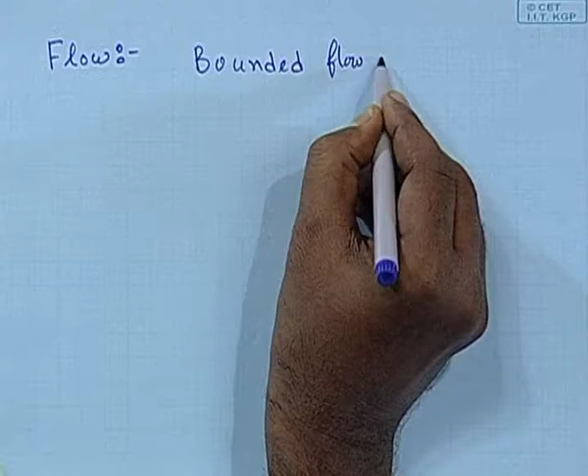The flows will be considered mainly of 2 types. One is bounded flow - the example is flow through a conduit. This conduit may have a circular cross section, then it is a pipe. It may have a rectangular cross section, then it is a channel flow. It may have a triangular cross section or whatever.

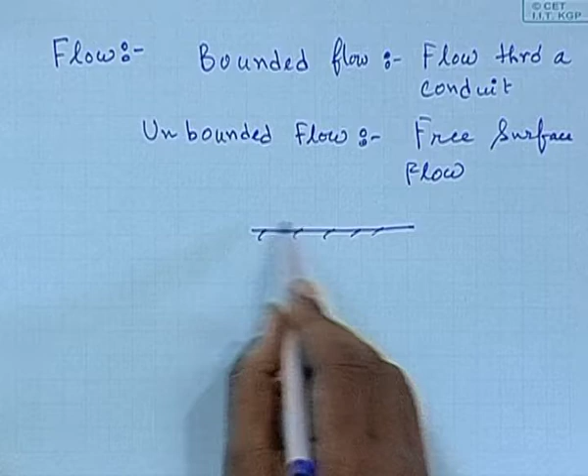The second one is unbounded flow, sometimes known as free surface flow. That means it is not flow through a conduit - there is a solid wall, flow is occurring over that, and the other end is open to atmosphere. This surface is free, it is not bound, so it is called a free surface flow.

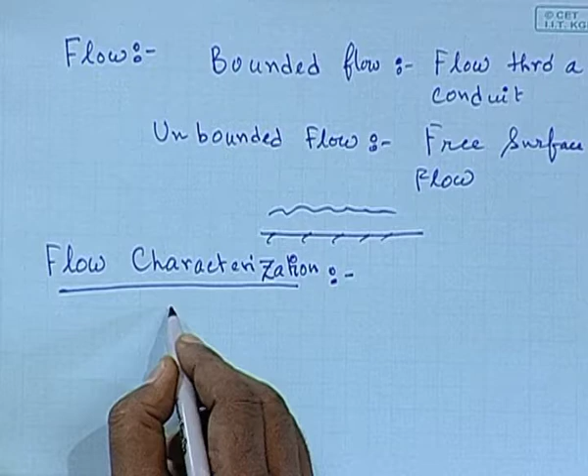Now, what is flow characterization? We will be looking into the point variation of some dependent variable inside the flow domain, like velocity components. It is basically the determination of velocity components as a function of x, y, z, t or r, theta, z, t - either in rectangular coordinates or cylindrical polar coordinates, whatever you are having. There will be three components of velocity: x component, y component, and z component, as a function of space and time. If you know this completely, then the flow behavior in the flow domain is completely established.

Determination of temperature profile.

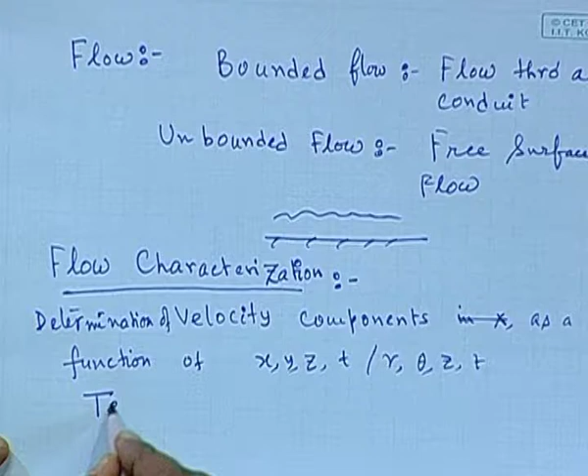Determination of concentration profile as a function of space and time. So, flow characterization means determination of velocity components, the temperature profile, the concentration profile of various species present in your system, as a function of space and time. Once all these quantities are known to you, you can characterize or visualize a flow.

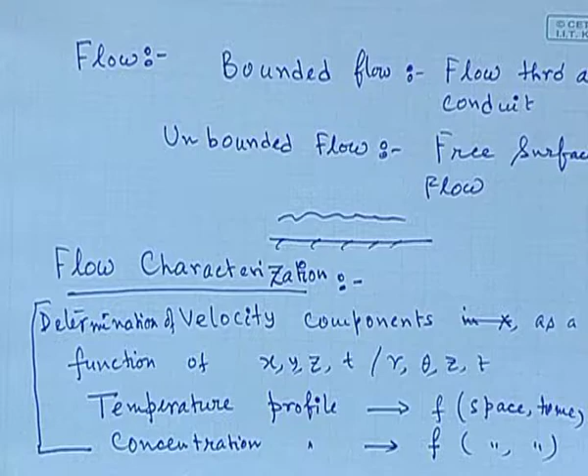Now, suppose you determine all these quantities, what is the outcome? What will you be doing with these determined quantities? The outcomes are, you can compute cross sectional average velocity. Suppose a steady state flow is occurring and you know velocity is a function of x, y, z. So, you can carry out a computation to calculate the average velocity, which is basically the average over the cross section. Why is this required?

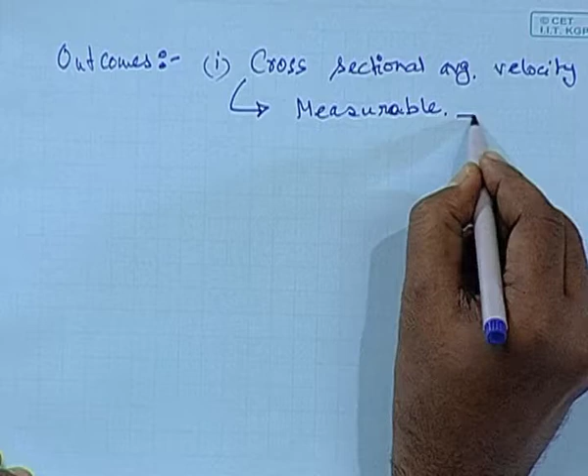You can measure this value. So, you connect all your computed variables to the measurable quantities, like there is an instrument called Rotameter, you must be knowing about it. What does the Rotameter do? The Rotameter is placed in the flow line and it measures the flow rate. Since the flow rate is measured, and you know the area of the cross section of your flow channel, you divide the flow rate by that cross sectional area, and you will be getting the average velocity.

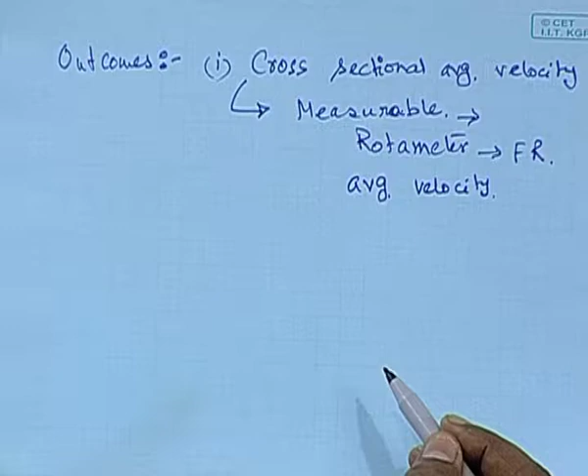So, all these quantities that you are computing or calculating should be compared against the measurable values. Like all the velocity components that you are calculating, you should calculate the cross sectional average velocity, because it is a measurable quantity. Why do that? You can determine whether the flow is laminar or turbulent. This is directly connected to determination of flow regime: laminar, turbulent or transition.

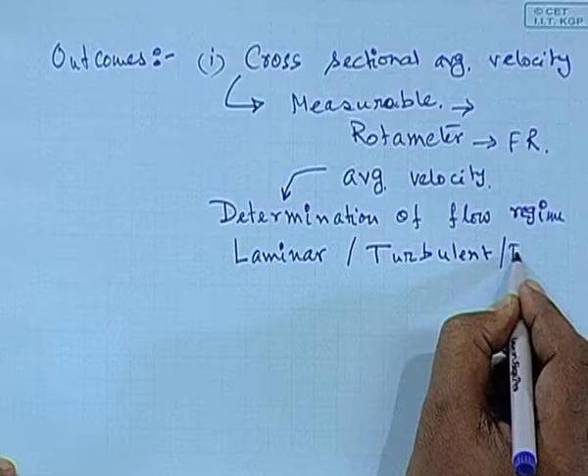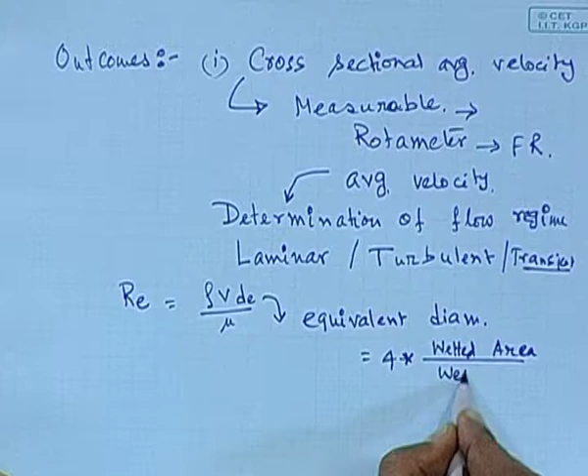There is a dimensionless number called Reynolds number. It is defined as rho v d by mu. D is basically equivalent diameter. De is equal to pipe diameter if it is a flow through a pipe. It is equivalent diameter for other channels, defined as 4 into wetted area divided by wetted perimeter. D is basically diameter if it is a pipe. If it is not a circular cross section, it will be calculated using this formula.

Suppose you are having a rectangular cross section with W as the width and H as the height. What is D equivalent? D equivalent will be nothing but 4 times wetted area. What is the wetted area? Width times height. What is the wetted perimeter? Now, if h is very small compared to width, if it is a thin channel, then you can neglect h in the denominator, and this w will simply cancel out, giving twice of h. This applies if it is a very thin channel.

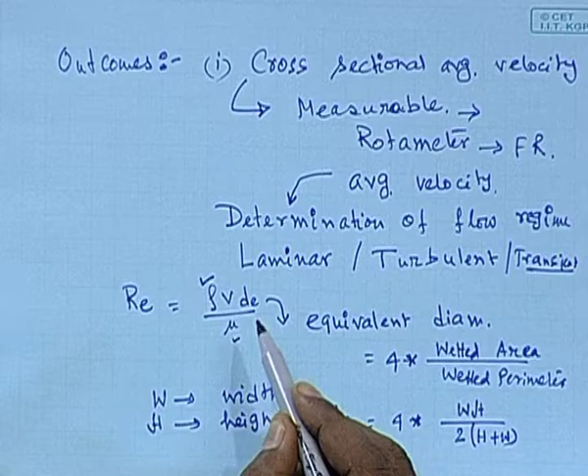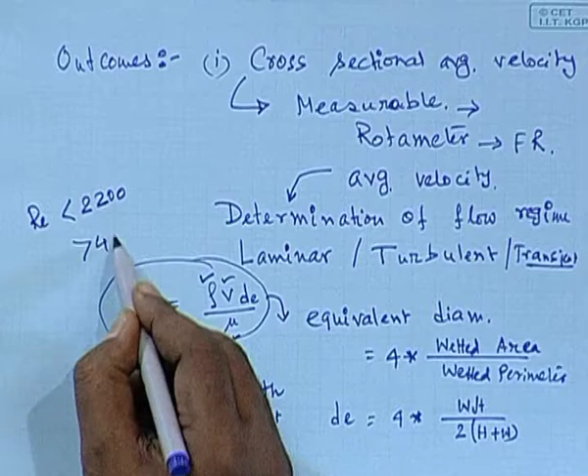Now, rho is the density of the fluid, mu is the viscosity of the fluid, v is the cross sectional average velocity. Once either you measure or calculate the cross sectional average velocity, calculate the Reynolds number, that is important. If Reynolds number is less than 2200, it is called a laminar flow. If it is greater than 4000, it is called a turbulent flow. If it is in between, it is called a transient flow. So, from the cross sectional average velocity, you can find out the Reynolds number in your flow domain and the flow regime, whether it is laminar, turbulent, or transient.

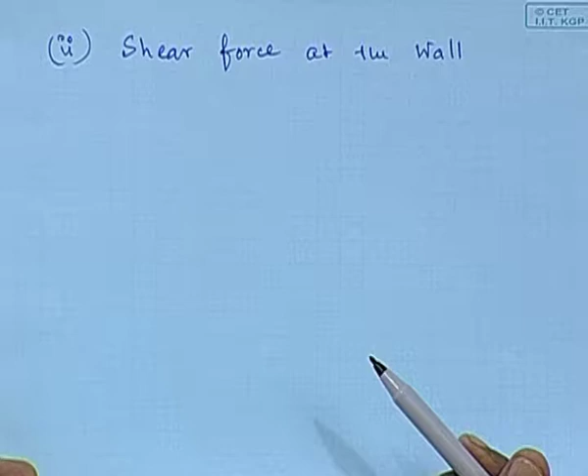The second quantity that you can calculate is the shear force at the wall. That means if there is a flow over a plate or over a tube or whatever system you are having, the fluid flowing over the wall will give rise to a force. So, you have to apply an equal force from outside to keep the material, over which the flow is occurring, in place. That shear force can be calculated from the cross sectional average velocity.

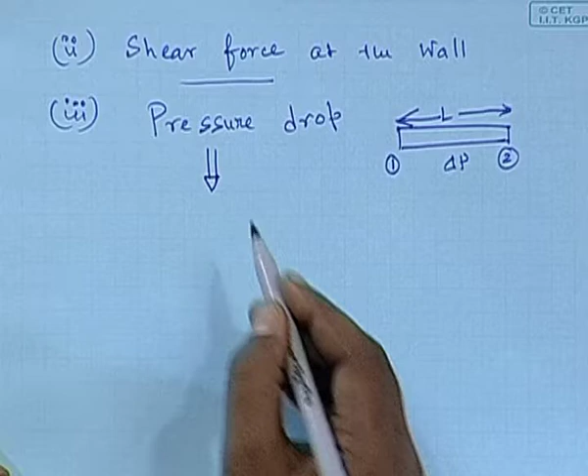The third quantity you will be calculating is the pressure drop. From all these velocity components etc., you can find out what is the pressure drop across the line. Let us say station 1 and station 2, what is the delta p over this length L. This is very important from a chemical engineering point of view. Whatever you do in any fluid mechanics book, a typical exercise will ask you to calculate the pressure drop across this length. You do a heat exchanger calculation, and one of the design aspects is calculation of the pressure drop.

A pump is forcing a fluid to flow from station 1 to station 2. What is the pressure drop? Why is the pressure drop important? The pressure drop is important because the flow is occurring due to that pressure drop, and the upstream pressure is always greater than the downstream pressure, so that the flow will occur in the forward direction from 1 to 2. Now, estimation of delta p is very important because it directly relates to the rating of the pump.

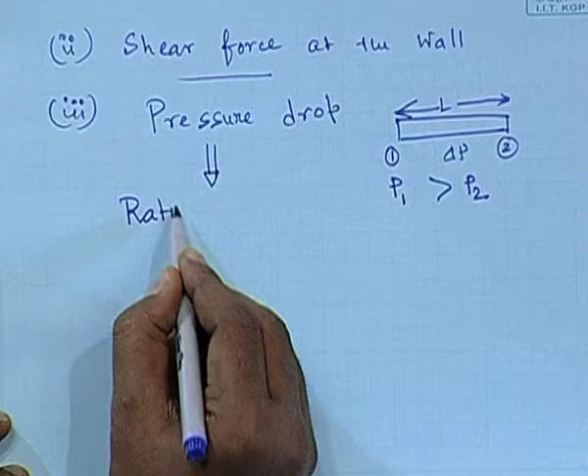What is the power of the pump that you will be requiring, maybe you will be designing for your plant? You have to calculate if this much amount of flow is occurring through a tube of this length and diameter, what is the delta p, which is directly related to the rating of the pump. So you can tell them, I require a 1 horsepower pump to materialize this type of operation.

Whenever you will be transporting a liquid, you require a pump. Whenever you will be transporting a gas, you will be requiring a compressor. So whatever the fluid may be, you require the pressure drop calculation. That is very important.

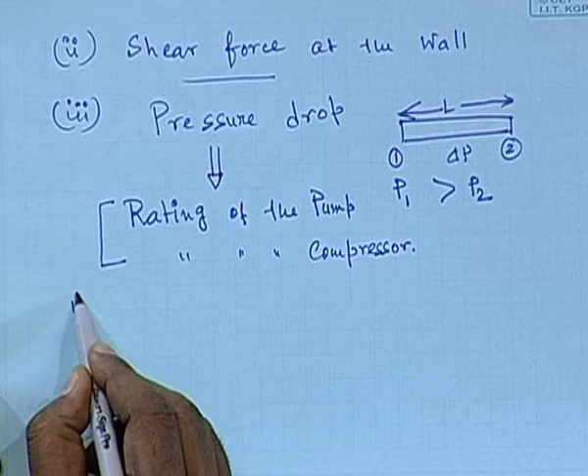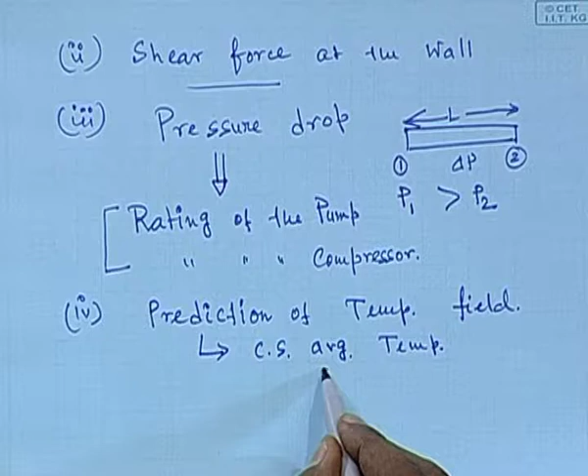The fourth one is prediction of temperature field. From that you calculate the cross sectional average temperature. Temperature field means temperature is a function of x, y, z and t. Now you do a cross sectional averaging and get the average temperature. This is measurable - you just insert a thermometer or thermocouple, that will not give you a point value of temperature, it will give you an average value.

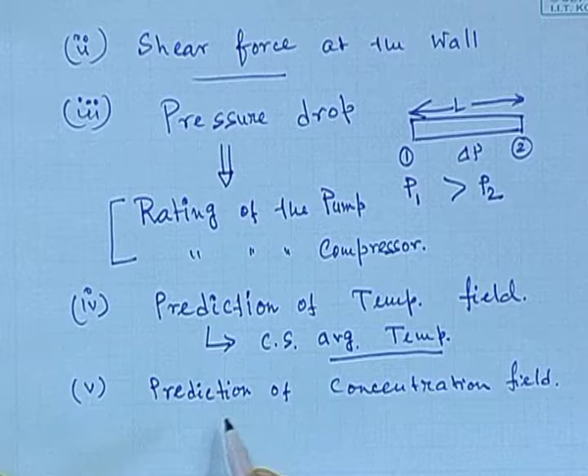You calculate the concentration field as a function of space and time and do a cross sectional averaging. If you take out a sample from any point of the pipeline and give that for analysis in the laboratory, that will give you basically the average concentration. So the cross sectional average concentration is important, and you can compare your calculation with these measured values and come to a conclusion whether your calculation is correct or not.

Why are you requiring these calculations? Because whenever you will be joining a company or doing some R&D activities, probably you will be given a target - this much amount of flow rate, or this much amount of product liter per day I would like to have. Now you have to give a design - what will be the length, what will be the diameter, what will be the pressure drop, what will be the rating of the pump. Now you conduct certain experiments, and you can say okay, these will be the specifications so that you will be meeting your target.

Now your business will be growing up, and after 6 months you would like to scale up your plant. So again you will be doing the same type of experiments? No, you should not, because conducting experiments requires involvement of manpower, cost of raw material, cost of equipment. So you do a model calculation and predict on a very small scale what will be the performance. If that matches with the experimental results, you can just scale up your feed components, or concentration, or volume of the reactor, etc., and get your predictions. By doing these calculations, first, you will be reducing the number of experiments you conduct to verify a particular target. Secondly, by doing this simulation, you will be reducing your manpower involvement and cost involvement of raw material or daily labor. That is why these calculations are very important.

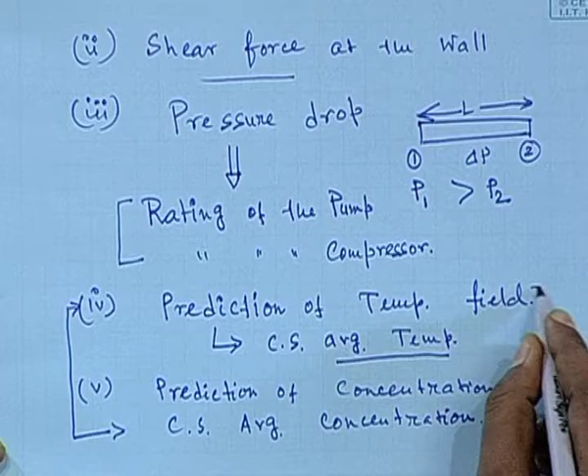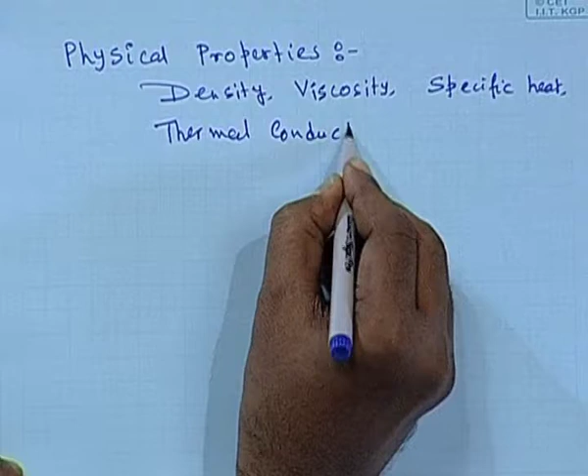Let us look into the various physical properties that will be involved in such calculations - density of the fluid, viscosity of the fluid, specific heat, thermal conductivity, diffusivity.

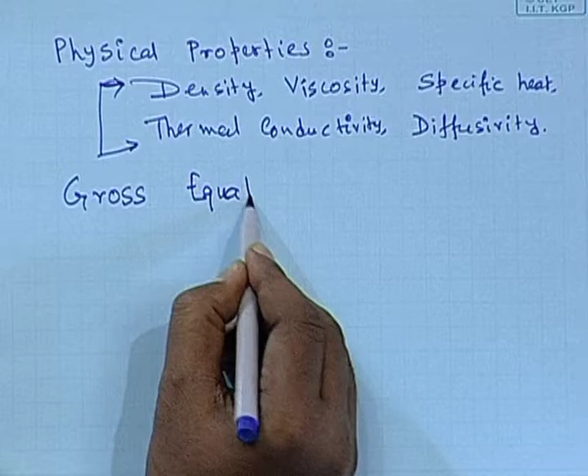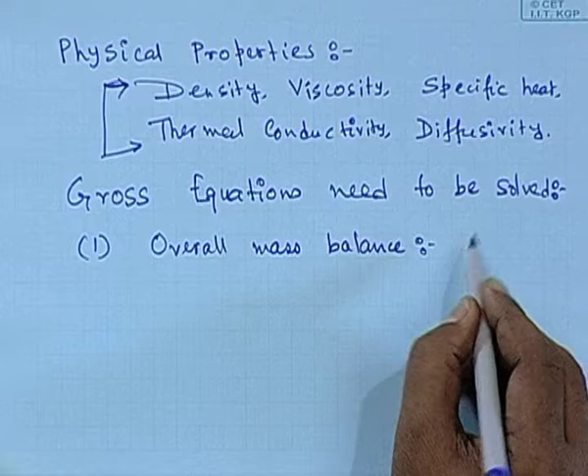These properties are typically involved in all of the transport calculations, and these are also known as the transport properties. Now let us look into what gross equations need to be solved in such calculations. The first equation you are going to write is the overall material balance. In its differential form, all these equations are partial differential equations. The overall mass balance or material balance is basically also known as the equation of continuity. The second group of equations you are going to write down is the momentum balance equation.

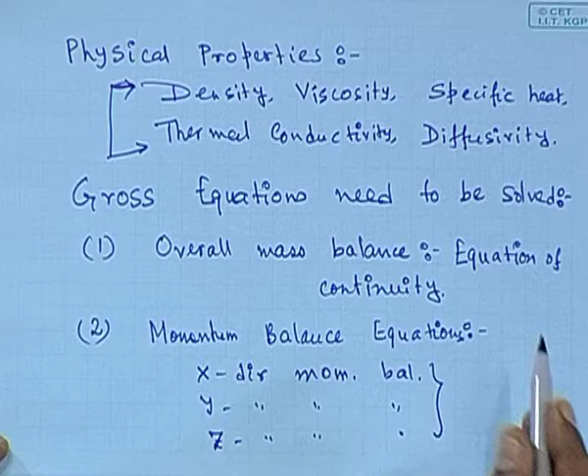In momentum balance equations, you will get 3 momentum balance equations: one in the x direction, second in the y direction, and third in the z direction. All these equations involve Vx, Vy, Vz and pressure. Vx is the velocity component in the x direction, and similarly for y and z directions, and pressure variation as a function of x, y and z.

These equations are also known as the equations of motion, and they are also known as the Navier-Stokes equations. So you will be writing one overall mass balance and 3 overall momentum balance equations in their differential form.

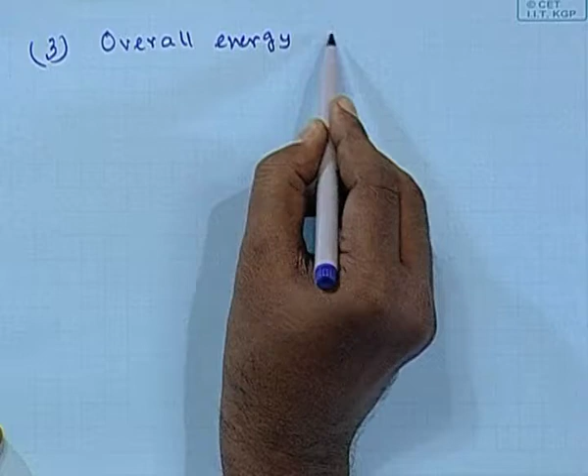The third equation you are going to write is the overall energy balance. From this, you will be getting the temperature profile as a function of x, y, z and t in general. This overall energy balance involves the velocity terms as well as the conductive terms, that is, convective terms as well as conductive terms. So these will be coupled with the momentum balance equations.

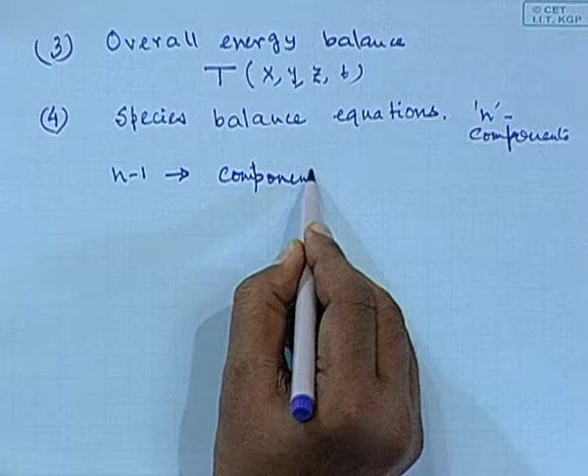Suppose you are having a reactive system. Two reactants are reacting and giving rise to one product, two products, or whatever products. Let us say n number of species are involved, n components are involved. So you will be writing n minus 1 component balance equations, species balance or component balance equations. Why n minus 1? You will leave behind one, the last component, which will be calculated from the overall material balance.

Overall material balance has to be used to find out the concentration of species, let us say the nth component. For n minus 1 components, you will write the component balance equation, and the last one will be found out from the overall material balance. If you write the component balance equation for the nth component instead, you will find that the overall material balance may not be matching.

Then that will be a typical problem, a very serious problem. You are doing a calculation, a simulation between 2 points through a pipeline where a reactive system is going on, let us say a polymer reaction, and you know how much monomer has been fed per unit time. The same amount of product should come out at any cross section at the exit of the pipeline or reactor. So the matching of total material balance is very crucial.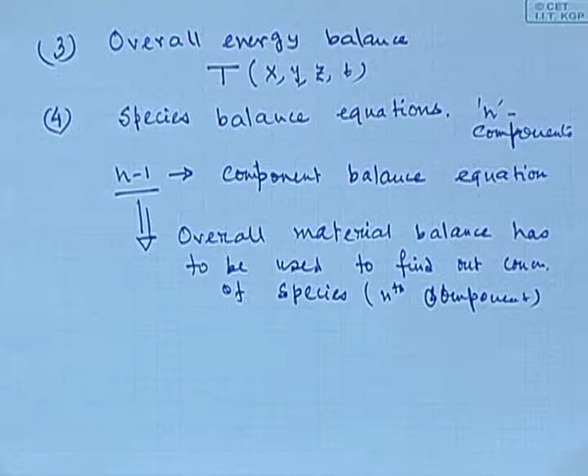Recently we were doing a project for Gas Authority India Limited. They had some polymer reaction going on in their reactor system, and we had to simulate the reactor system. We found that whenever we wrote all the component balances, the overall material balance was not matched. It always happens. So you leave behind only one component, do n minus 1 component balances, and calculate the last one from the overall material balance by subtracting.

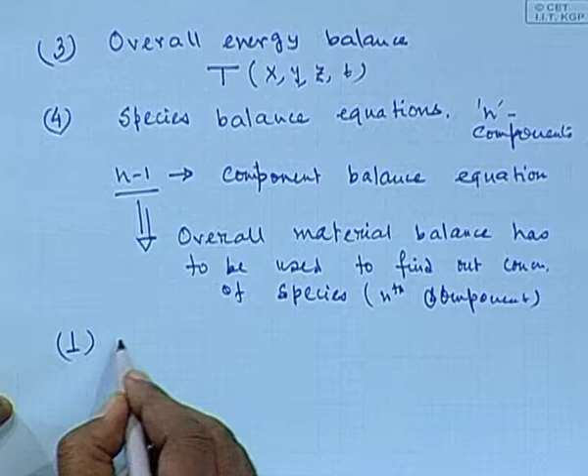So from equations 1 and 2, you will get the velocity components and pressure distribution. That means you will be getting Vx, Vy, Vz and P as a function of x, y, z and t. There are 4 unknowns and 4 equations: 3 equations in momentum balance and 1 equation in the continuity equation. So, 4 equations, 4 unknowns, a solvable system.

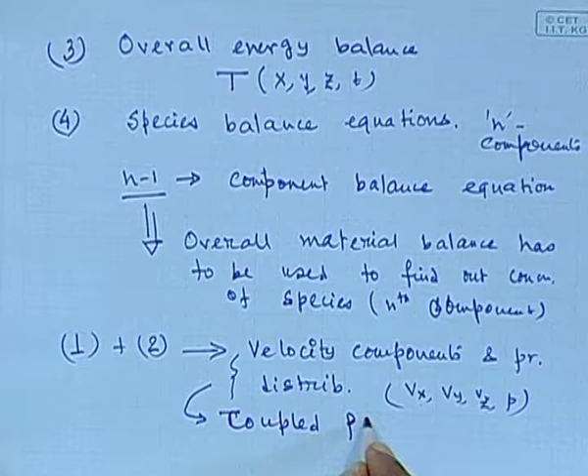Now, typically these equations are coupled partial differential equations. Under certain simplistic situations, you can simplify these equations and omit some of the terms.

A typical example is, suppose there is a flow through a thin channel, and the z component is pretty long. If the z component is pretty long, all the derivatives with respect to z will be very small. So you can neglect those terms occurring as del z, since they will be negligibly small compared to the other terms. So under certain simplistic conditions, the various terms in the equation of motion can be omitted and the whole equation can be simplified.

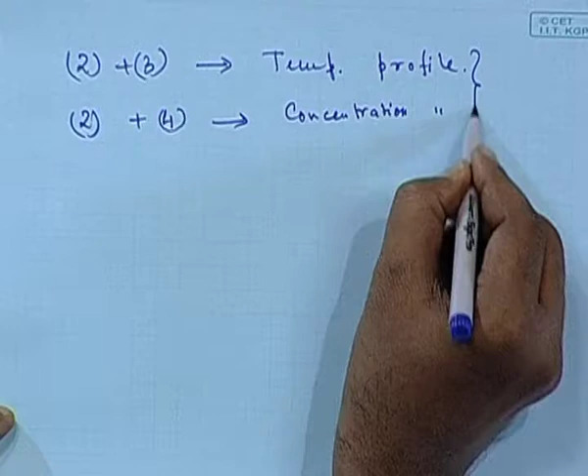From equations 2 and 3, you will get the temperature profile. From equations 2 and 4, you will get the concentration profiles of various species. These are coupled equations, but under certain situations, they can be decoupled.

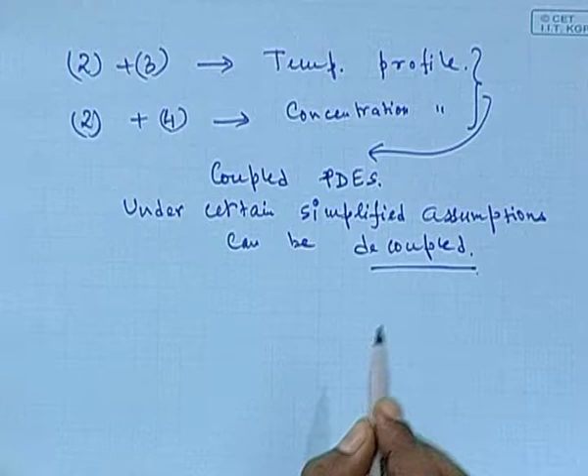We have discussed several equations and covered all the equations required to solve problems in this course or any transport process. Now, specifying an equation to solve a particular problem is not enough. You must also have certain boundary conditions.

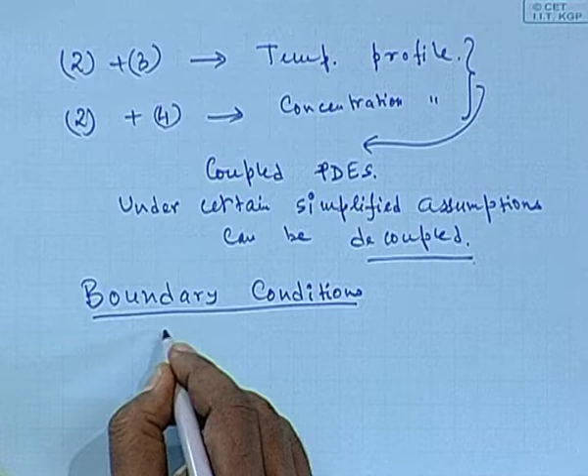Without boundary and initial conditions, you cannot solve a differential equation. Let us look into typical boundary conditions that appear in fluid mechanics problems. Generally, six types of boundary conditions can occur.

The first one is the solid surface. The condition on the solid surface must be specified, and this solid surface can be porous like a membrane, or impervious like a solid tube.

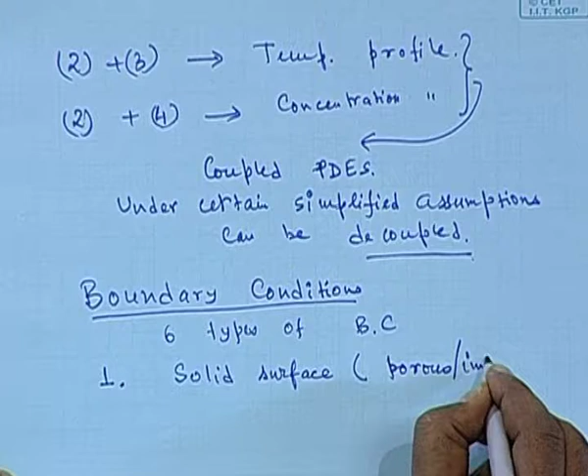A free liquid surface, such as in open channel flow or free surface flow.

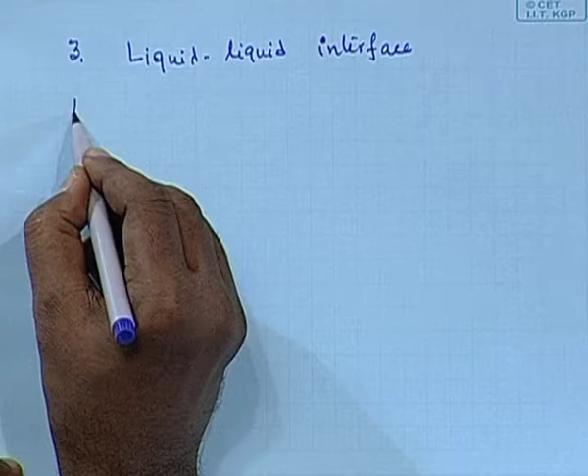Liquid vapor interface.

Sometimes the inlet or exit conditions are specified, and these appear as boundary conditions in our problem. Suppose there is flow through a channel with a reactive flow, and at the inlet the concentration is specified as C naught. That becomes one of the boundary conditions.

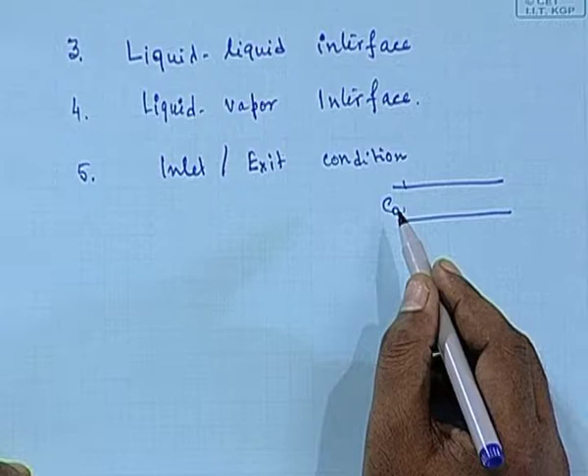The sixth one is known as the physical boundary condition. The other five boundary conditions we discussed are specified directly in the problem. But the physical boundary conditions may not be specified; they appear from confirming the physics of the system.

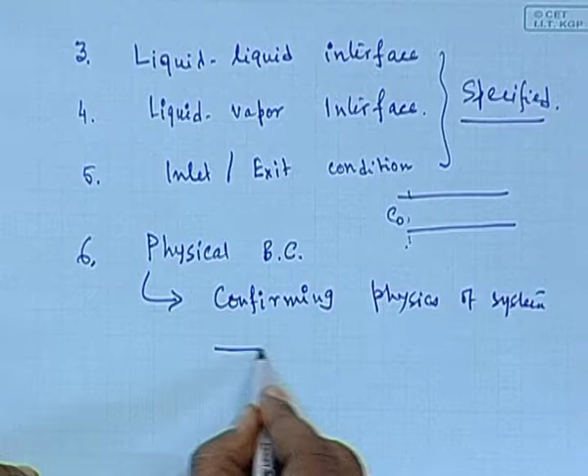Suppose there is flow through a tube of radius R, with fluid flowing with velocity V in the x direction. At r equal to capital R, the velocity component in the x direction is zero, because the wall is stationary. This is known as the no slip boundary condition, which I will explain further shortly.

On the other hand, at r equal to R, these equations are typically second order, so you require two boundary conditions to solve them. At r equal to 0, meaning at the centerline, the velocity will be finite, but you do not know its value. In fact it will be maximum there, assuming some finite non-zero constant value, but you do not know that value.

So either you use V x is finite at r equal to 0, or you use del V x del r equal to 0 at r equal to 0. V x finite means mathematically you have a profile like a1 plus a2 by r plus a3 r squared, and the constants are evaluated from the conditions.

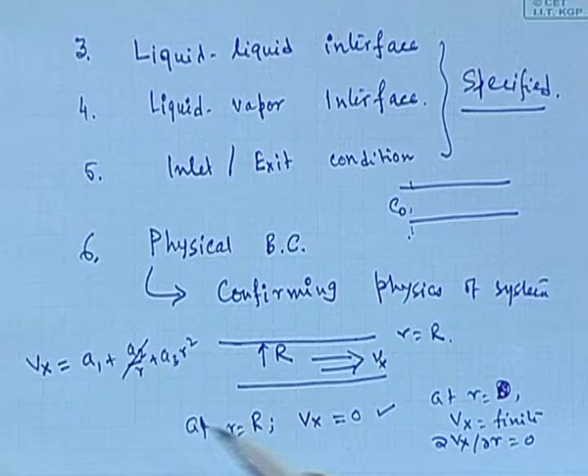At r equal to 0, V x should assume some finite value, but if you put r equal to 0, the a2/r term becomes infinite, making the whole velocity component infinite, which cannot happen. So the conclusion is that constant a2 equals 0, which is equivalent to saying del V x del r equal to 0. This comes from the physics of the system, and is known as the physical boundary condition.

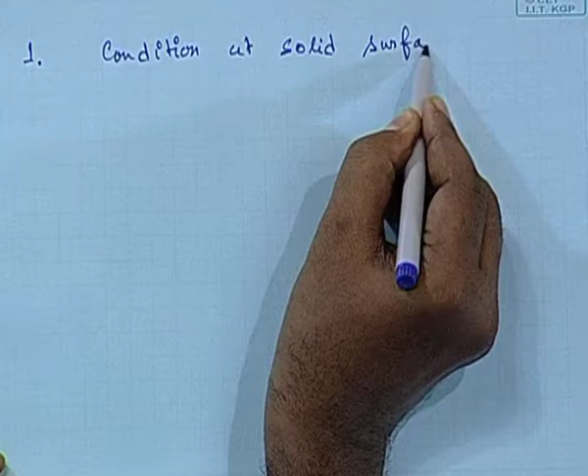Some examples of this boundary condition: the condition at the solid surface. If you have a stationary or impervious wall, V is equal to 0, meaning V x equals V y equals V z equals 0.

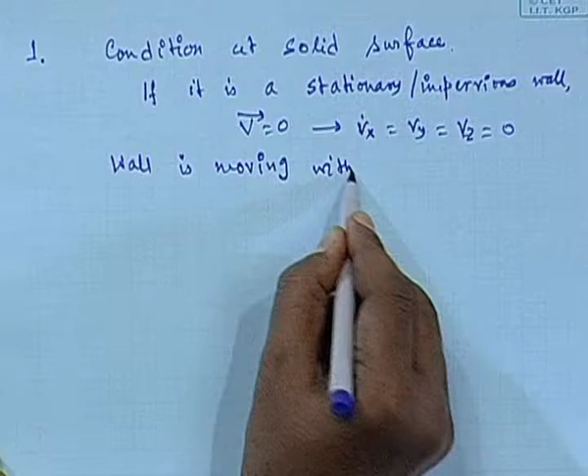If your wall is moving, let's say moving with a constant velocity u0 in the x direction, then V x will equal u0 at the wall. This is known as the no slip boundary condition.

There is absolutely no slip between the wall and the fluid particles adjacent to it, meaning the fluid particle assumes the velocity value of the wall. If the wall is stationary, the fluid particles will be at rest there. If it is moving, the fluid has the same velocity. This is known as the Couette flow, the flow induced by the motion of the wall.

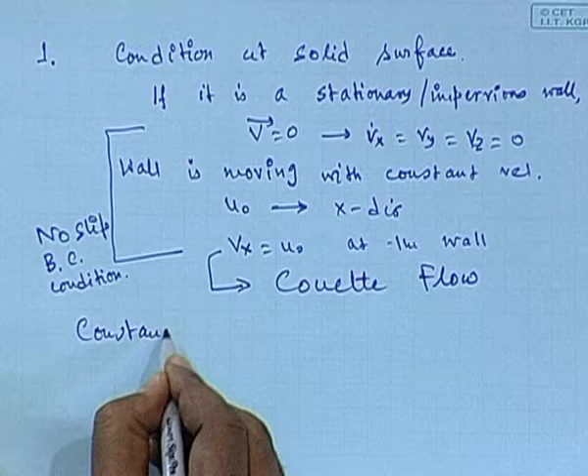Similarly, you can have a constant wall temperature condition, known as the CWT condition. Suppose fluid is flowing through a tube, and at r equal to capital R on the wall, you maintain a constant temperature T naught. This is known as the constant wall temperature condition.

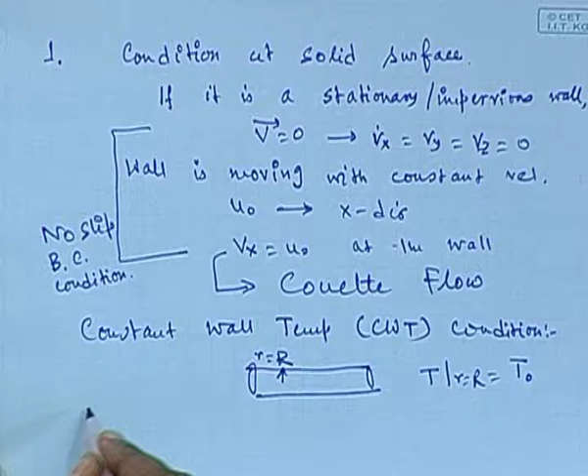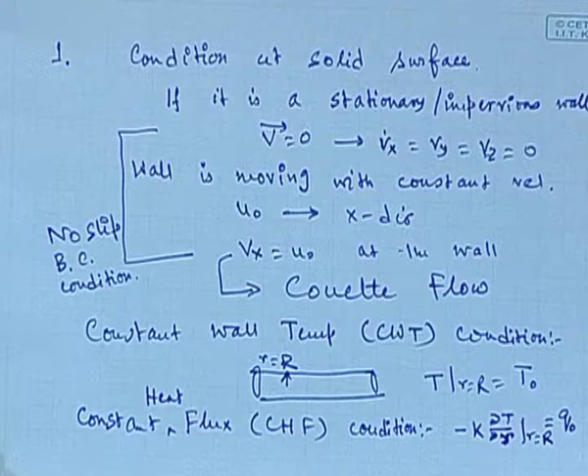Sometimes the heat flux at the wall is maintained constant, known as the constant flux condition. In this case, minus k del T del r at r equal to capital R is constant, let us say q naught. Suppose you put an electrical wire around the tube and pass a current generating energy at a constant rate, adding constant heat flux at the wall. Sometimes heat is extracted from the wall at a constant rate. Either way, it is known as the constant heat flux condition.

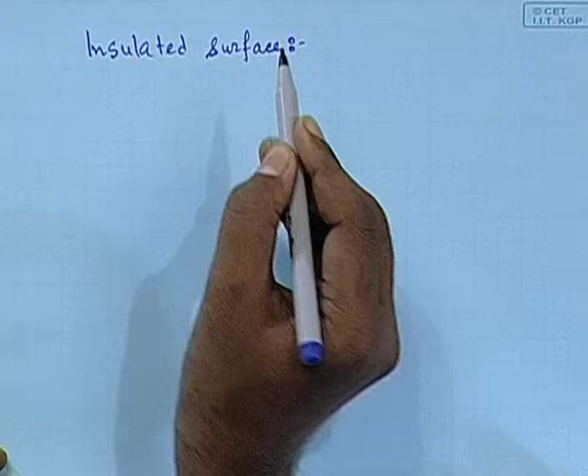Insulated surface is another example. The surface is insulated, meaning you are not allowing any heat to go out or come into the system. That means at the surface, minus k del T del y equals 0, where y is normal to the surface. So del T del y equals 0.

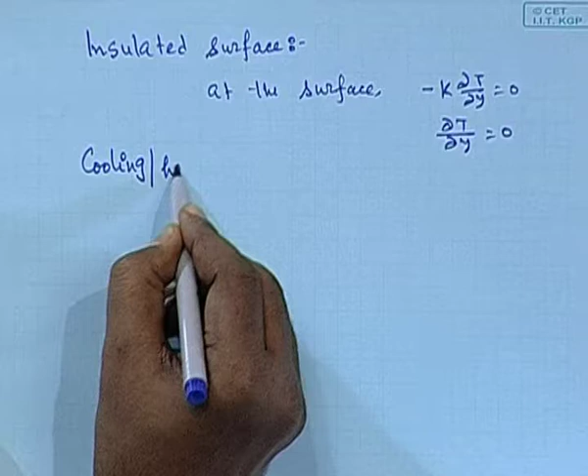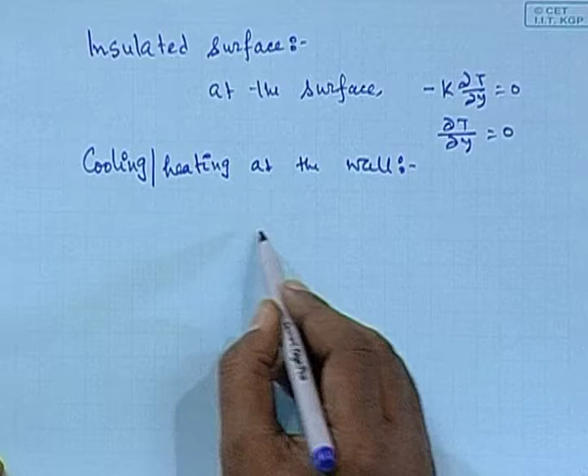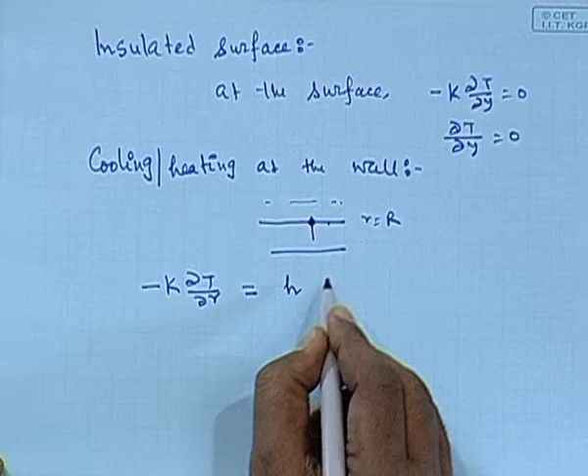Cooling or heating at the wall: suppose you are conducting an exothermic reaction in a tubular reactor and the temperature is rising, so you want to cool it down. On the outside of the reactor you put a cylindrical jacket and pass ice water. For this situation, the total heat coming out at the wall will be convected away by the fluid outside. That means minus k del T del R equals the heat flux at the wall, which equals the heat convected away by the coolant, h times (T minus T C), where h is the heat transfer coefficient and T C is the coolant temperature at R equal to R. This is known as the cooling-heating condition at the wall.

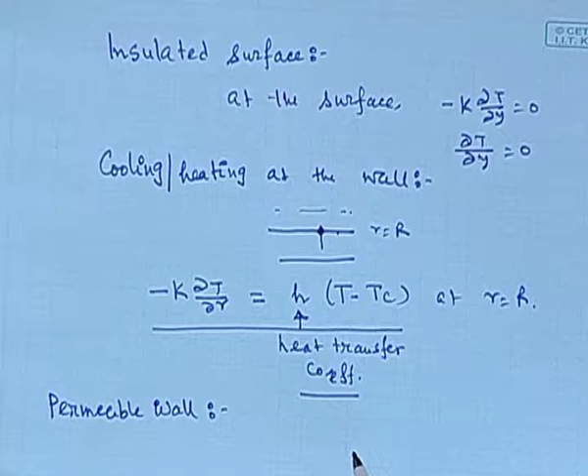Permeable wall: suppose the wall is porous like a membrane. In a channel, you place a membrane at the bottom plate, so fluid will come out through the porous membrane. At y equal to 0, Vx equals 0 because of the no-slip condition, since the wall is not moving in the x direction. But Vy equals minus V0, where V0 is the constant permeation rate through the wall. If the wall is permeable, this type of boundary condition can appear.

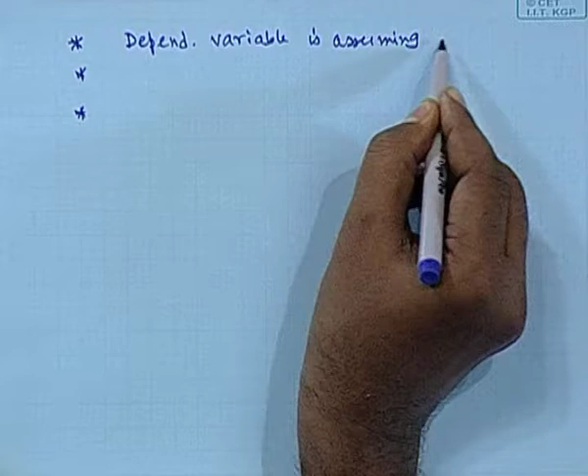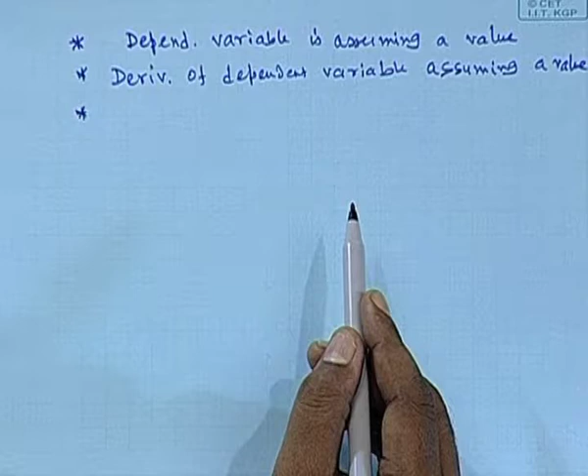Now in mathematical terms, you have seen three kinds of boundary conditions can appear. First, the dependent variable assumes a value, for example velocity equals 0 or temperature equals T naught. Second, the derivative of the dependent variable assumes a value, for example the insulated wall where del T del y equals 0, or the constant heat flux condition where minus k del T del y equals Q naught. Third, the dependent variable and its derivative, where these derivatives are basically normal derivatives to the surface.

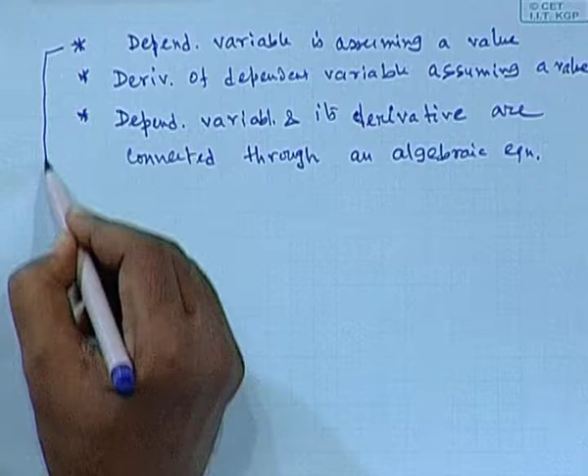The dependent variable and its derivative are connected through an algebraic equation, like the cooling-heating boundary condition, minus k del T del y equals h times (T minus T c). So T and its normal derivative del T del y are connected through an algebraic equation at the surface. In mathematical terms, the first class is known as the Dirichlet boundary condition. The second class, where the derivative of the dependent variable assumes a value, is known as the Neumann boundary condition. The third, where the dependent variable and its derivative are connected through an algebraic equation, is known as the mixed or Robin boundary condition.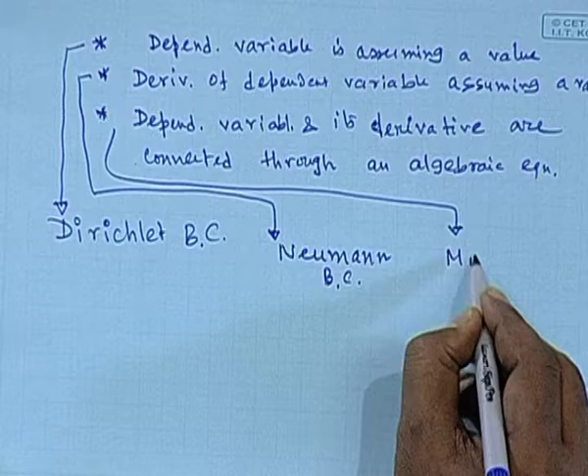The second type of conditions we have talked about are liquid-liquid, solid-liquid, or liquid-vapor interface conditions.

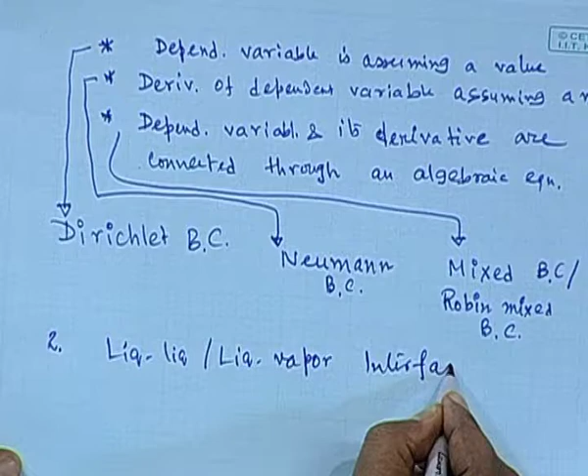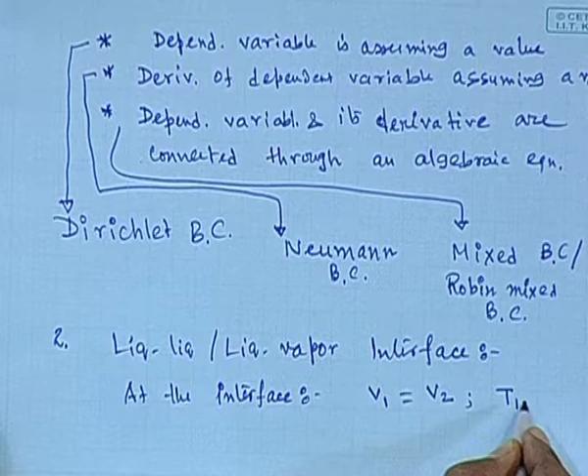Suppose you have a flow of two immiscible liquids through a tube or channel, like kerosene and water. What will be the interface boundary condition? At the interface, there will be continuity of velocity, meaning velocity of phase 1 will equal velocity of phase 2. There will also be continuity of temperature of the two phases at the interface, and continuity of shear force, meaning tau 1 equals tau 2. In terms of velocity profile, this is written as mu 1 del V1 del y equals mu 2 del V2 del y.

Now, if it is a liquid-vapor interface, let's say 1 is vapor and 2 is liquid. For an air-water interface, air has a viscosity around 10 to the minus 5 Pascal second, while water has a viscosity of 10 to the minus 3 Pascal second. Typically, vapor viscosity is at least 2 or 3 orders of magnitude less than liquid viscosity, so mu 1 is very small compared to mu 2. Hence, for a vapor-liquid interface, del V2 del y will be equal to 0, simply because mu 1 is orders of magnitude less compared to mu 2.

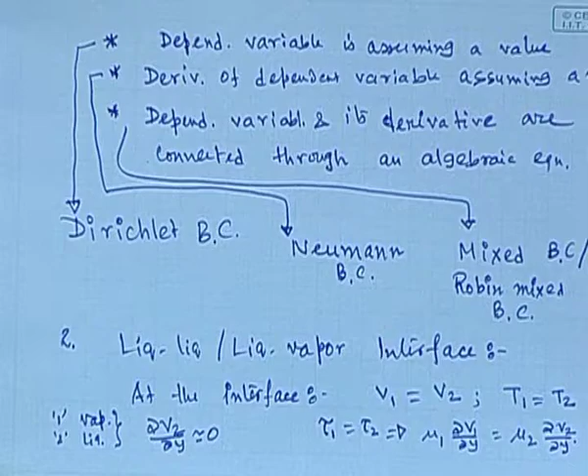Inlet and outlet conditions will also be specified. Suppose fluid is coming into a pipeline or similar system — at the inlet, the temperature, concentration, and so on will be specified, as well as the pressure.

The last one is the physical boundary condition. For example, for flow through a pipe, at r equal to 0, the boundary condition will be del V del r equal to 0, or del Vx del r equal to 0 if it is in the x direction, or Vx is finite.

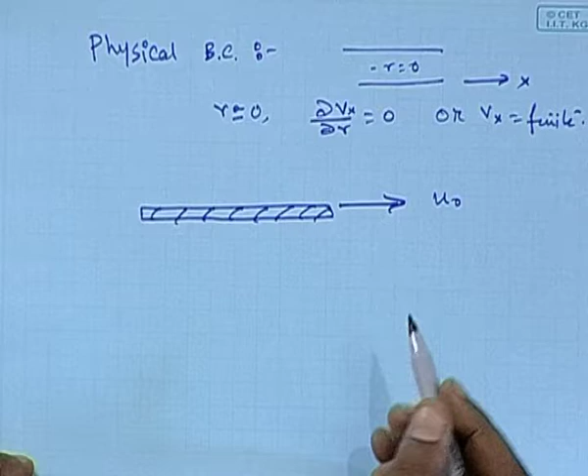Another example: suppose there is a stationary plate placed in a stationary fluid, and at time t equal to 0, it starts moving in the x direction with a constant velocity u0. In that case, the fluid particles closest to the wall will have velocity u0 because of viscosity, which creates resistance against the flow. As you move away from the surface, the fluid particles will have less velocity, and at some distance, let's say y equal to delta, the fluid particle will again be at rest — meaning it will not recognize the existence of the moving plate.

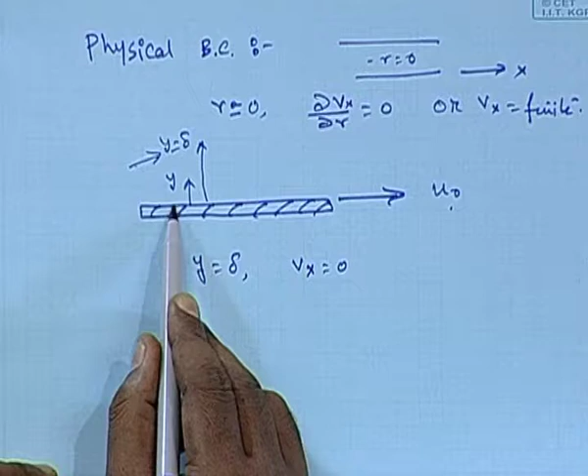So what will be the typical boundary condition? At y equal to delta, Vx is equal to 0, and at y equal to 0, Vx equals u0. Now, delta is unknown to you, so for ease of mathematical treatment, this is replaced by infinity, since the fluid particle will be at rest at an infinite distance from the plate. So we write y equal to infinity, Vx equal to 0. This is another example of a physical boundary condition.

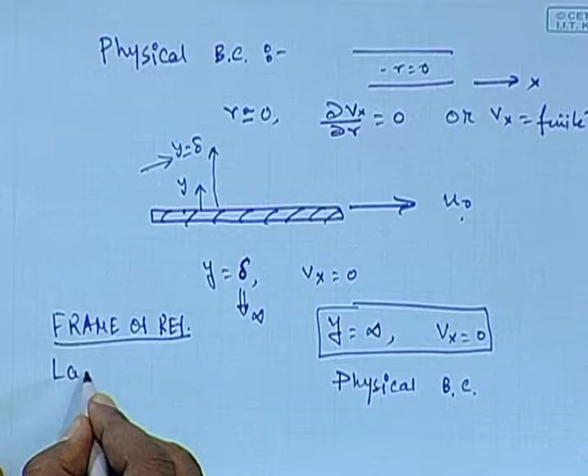Now, the frame of reference. There are two types of frames of reference generally used for these fluid mechanics calculations. One is the Lagrangian frame of reference, also known as the moving frame of reference.

Second one is Eulerian frame of reference, or stationary or fixed frame of reference.

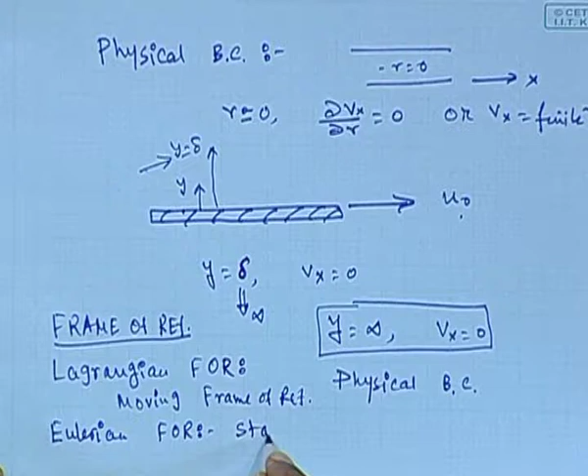Now, with Lagrangian frame of reference, you will be tracking all the fluid particles. Since it is a moving frame of reference, the observer is sitting on a fluid particle and tracking its motion. That will be very difficult, right? Not only that, if you use the Lagrangian frame of reference, you have to write down an infinite number of equations characterizing infinite number of particles in a control volume. That will be a heavy task or computation.

So generally Eulerian frame of reference, or stationary frame of reference, is used in all these fluid mechanics calculations.

Okay, anyway, we will be continuing these things in the next class, and we will be deriving the equation of continuity. Okay, thank you.

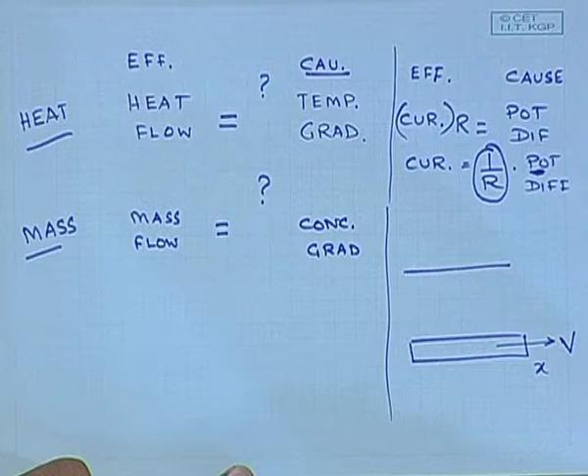The solid layer moves with some velocity in the x direction, and as a result, the liquid layer also starts to move in this direction. If I replace this liquid with a solid, what would be the velocity of the solid? Equal to V. But since it's a liquid, the layers, one on top of the other, will not move with the same velocity.

There would definitely be a gradient in velocity. The layer of fluid very close to the solid surface would move with velocity equal to V, but as I move away to another point, this layer would move at a velocity less than V. So as I progressively move in the y direction, my velocity would decrease.

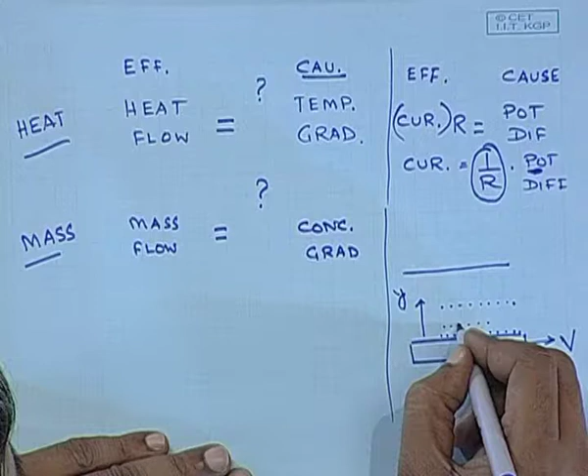Now what is the other effect of this? The molecules moving at a faster velocity compared to the layer just above it will travel to that layer and, as a result, impart higher momentum on the slower moving fluid. A layer of fluid moving at 5 meters per second, and this layer moving at 2 meters per second -- when molecules travel from here to there, they carry with them higher momentum which they transfer to the layer moving at slower speed, and as a result this layer also tries to move faster.

But whenever you talk about this transfer, there would be some sort of resistance, so these two layers can never move with the same velocity. This velocity would always be lower than the velocity of the plate, the velocity of a layer of liquid lower than it. So as you can see, there's some sort of transfer taking place here as well.

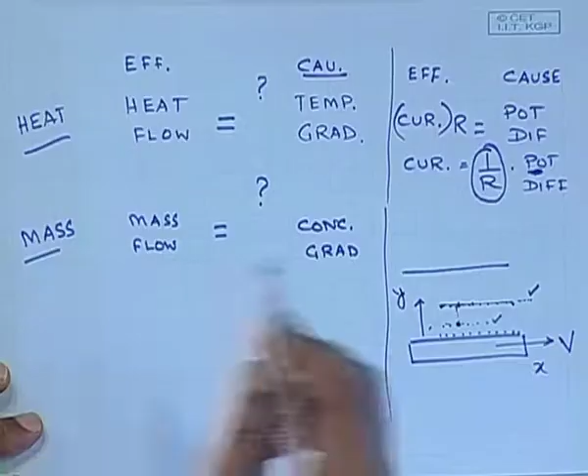This transfer is nothing but momentum transfer. So momentum transfer is the effect. Whenever you think of the motion of a fluid, whenever there is a difference in velocity in different layers of the fluid, what you have is transfer of momentum from one layer, from the faster layer to the slower layer. So the effect of this difference in velocity is momentum transfer.

And what is the cause of this? Velocity gradient. So it is not the absolute value of velocity, it is the difference in velocity over the distance between the two layers.